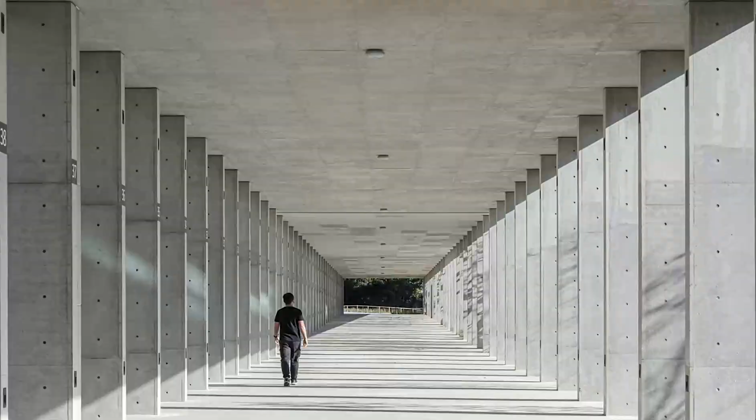So I don't know why the hell we are living in Taiwan, because we are constantly in danger of whatever, maybe from mainland China, from political turmoil inside Taiwan, from earthquake, from flooding, from typhoon.

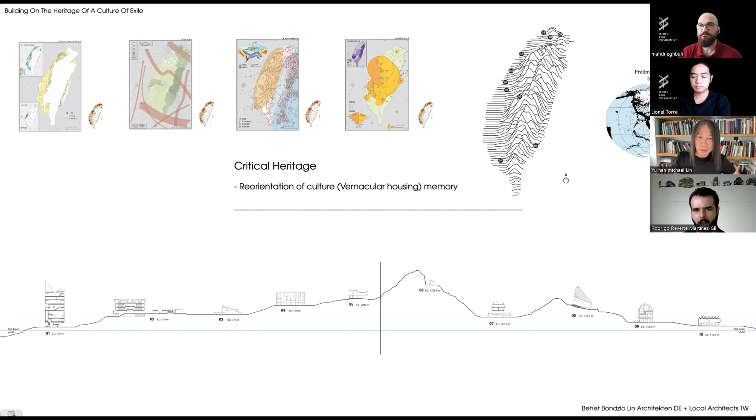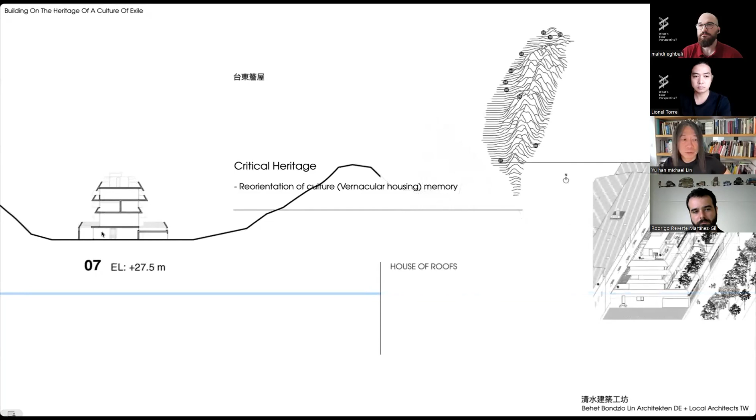And such a reflection will be more or less how we see, how this architecture, where is this architecture from. Going very quickly to this building, House of Roofs, which is the building I built and designed before I won this competition, Columbarium. You can see this is a composition of roofs.

You can see that whenever we visit the place, we first see our first impression of the place, wherever it is, the impression of the roofs, because the roof is the first thing that mediates between the shelter and the sky and the nature.

On the right-hand side is the site behind us. By law, we are only allowed to build whatever is inside with the arches. But they added four different kinds of different roof. First is the roof on the top, to prevent the wind and shelter the sun. Most of the time we have a worship center on the top, or the maids living on the top.

Second is this fake Renaissance roof. For them it's Renaissance, because the master bedroom is sitting behind. So this roof is more or less not functional, but more a gesture, a gesture of wealth.

And then on the lower side, you can see there's this roof, which is actually a roof for their garage. This part is illegal. So you can see that there are a lot of add-on, temporary, and deep-fake roofs somehow in this building, but it's actually in Taiwan. It's everywhere you go, it looks like that.

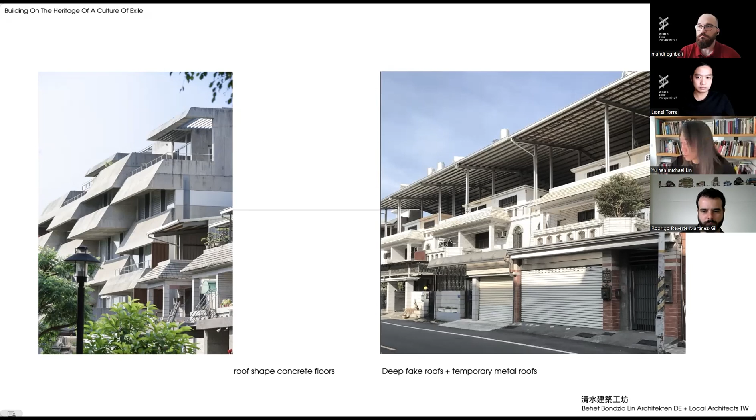So this is the result. We try to locate the roof in a way and stack them together, so that the rain will always fall to the garden, and we never have to collect the water again.

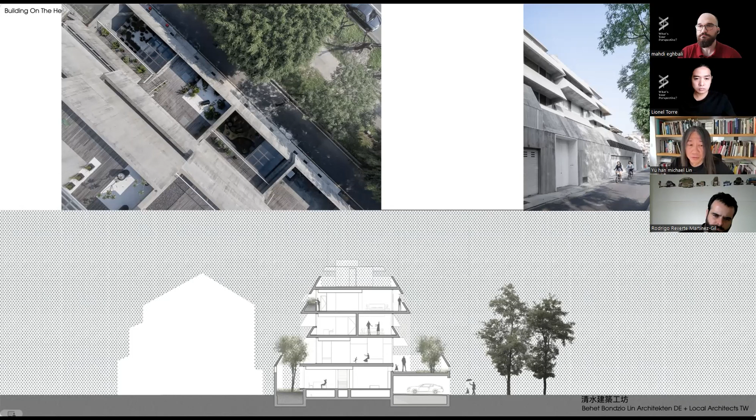And then the sun will be reaching, for instance, this is a sleeping room where we have a smaller gap. Here's the master bedroom facing the terrace in the front, where we're receiving more sunlight. On the lower part is the living room, where we have a private garden. So the roof and the terrace depths are actually a reflection, or the result, of the floor plan inside.

So that's for living people. How do we do with the dead?

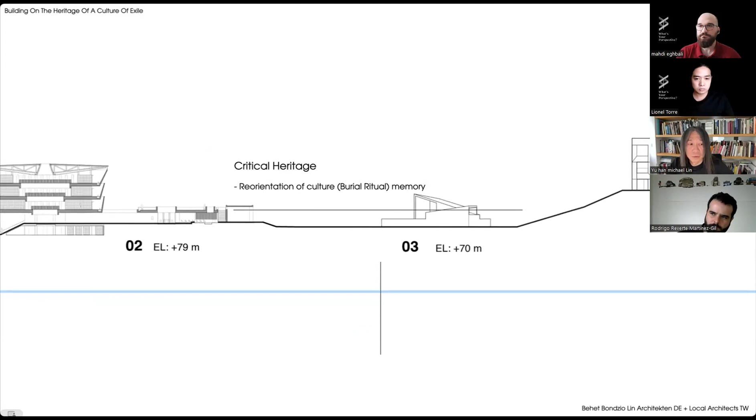So Hsinchu is actually a windy city, and rice noodle - the rice noodle, how to make dry rice noodle, because Hsinchu has a lot of rice noodle because it's a windy city, they have a lot of facility and a geographical advantage to dry noodle. So a lot of this rice noodle is produced in Hsinchu. So this is actually a monument, if we can say, monument nowadays.

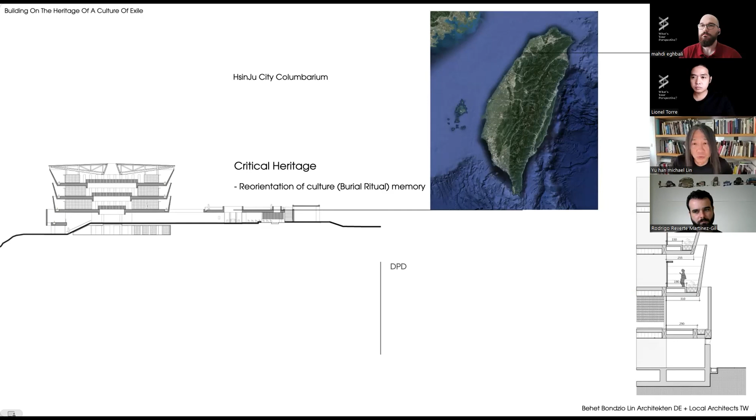What does it mean? The meaning of monument for me in this case is not only for the burial but as well for the wind. It's a tower to celebrate wind.

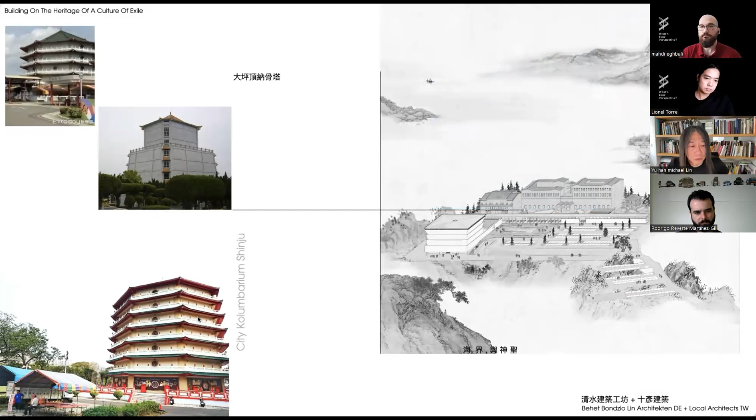This is the Columbarium in Taiwan, stacked up, with all the walls enclosed. Very small openings on the side, and inside there's actually air conditioning, although it's for the dead, I don't know why they have air conditioning inside.

On the right hand side, south side, we have 70,000 urns behind it already. This is the existing building. We are given, in this competition, the task to build another 50,000 urn capacity columbarium on this side.

So again, we have to come back and ask ourselves, this is structured by the ocean. What role does this building play in such a sacred space, and what is the public nature of this sacred space?

What I found very interesting is that the wall never plays a very important role as a carrier of memory in Taiwan, unlike in the Middle East or Europe, where a lot of walls play a very important role. Walls in Taiwan, unless it's a shrine, because that's more uplifting, more solid, implying a sense of eternity, were never really a carrier of memory.

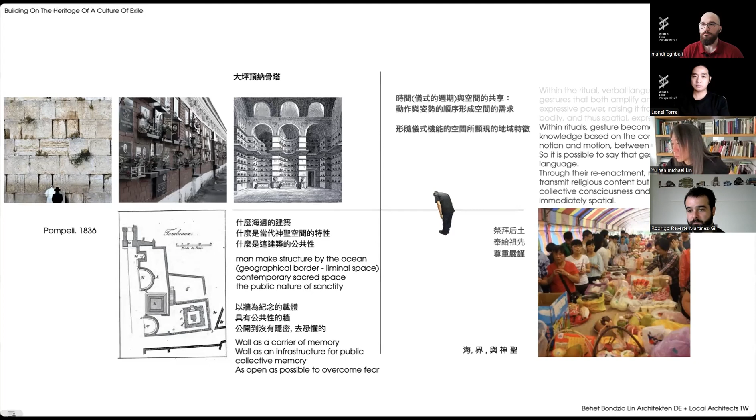Although it's probably more popular, it's in a way more fearless because it's so crowded and so loud, almost like a market, that you don't feel afraid. Everyone just puts the stuff there for maybe a couple hours and then brings it home and eats it, because you are there to salute the dead. That's the celebration. So in a way, it's actually very different from how we understand burial space in Europe.

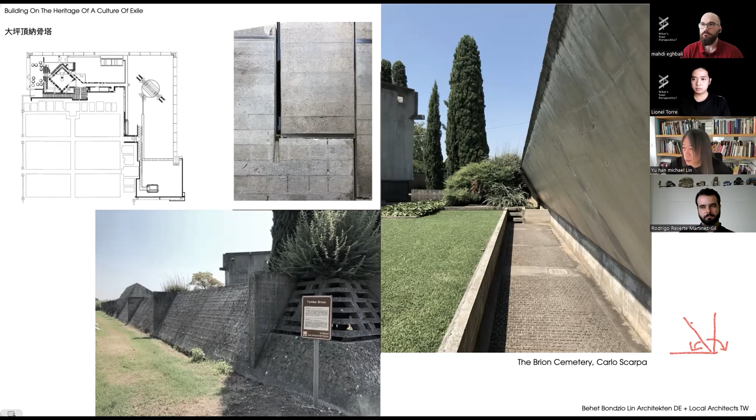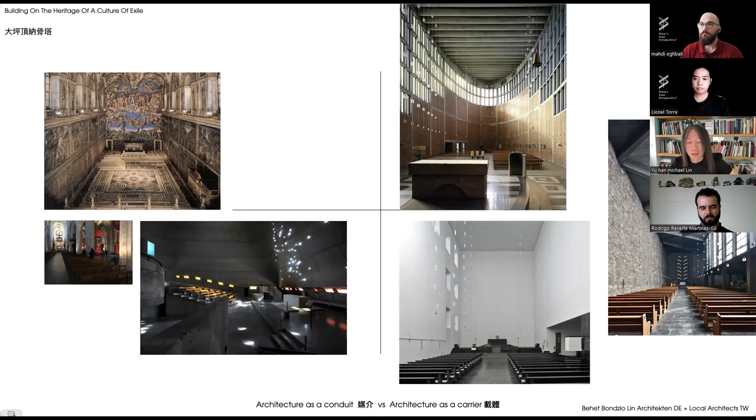One angle actually creates a shadow, one angle catches the light. We would like to think about architecture like a church as a conduit, but here architecture is almost like a carrier, and we're carrying our memory.

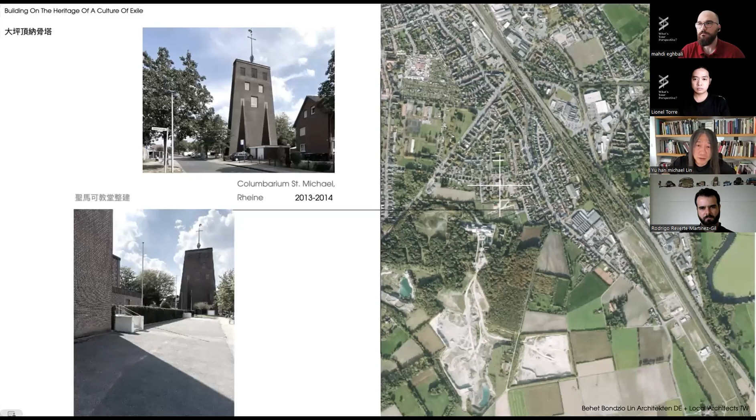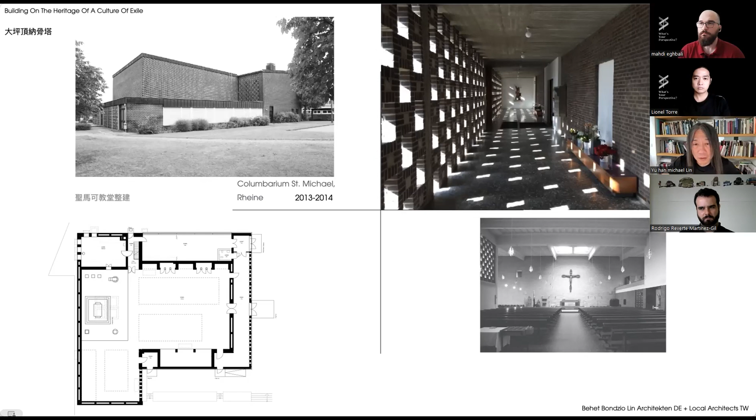Before this project, I did a project in Germany. It's a Columbarium, St. Michael in Rheine. It's a very small town, and this is a church built in the 70s. It's one of the early works of brick brutalist architecture, which I like very, very much.

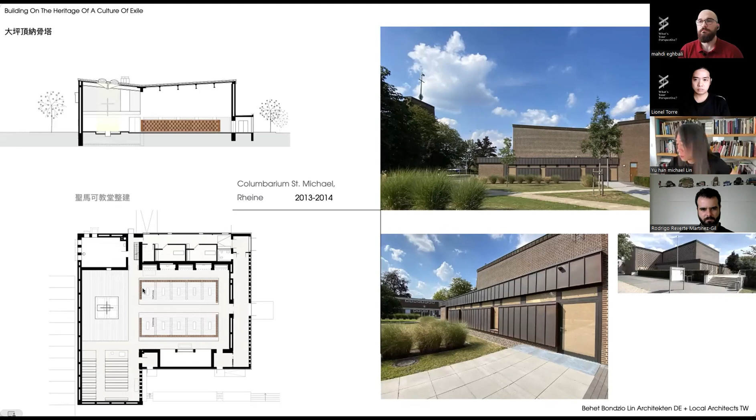We did a competition to renovate this church. When I did this competition, I wanted to make sure the wall of the urn is exactly where the sitting area was. That was the reason why we won the competition, because we wanted to have these 600 urns sitting as a congregation, so most of the people who built this church in the 60s and 50s, when they die, can choose their place and go back to where they belong.

I picked a very warm apple tree veneer, because I wanted this veneer to fit the color of the brick, and to give a very warm feeling rather than a dark and uncomfortable one. We would like to match it with the benches of the church, of course.

This cross is actually wood veneer as well, from the same wood. In the daytime you can see it lit by the skylights above, but in the nighttime, this cross will be lit.

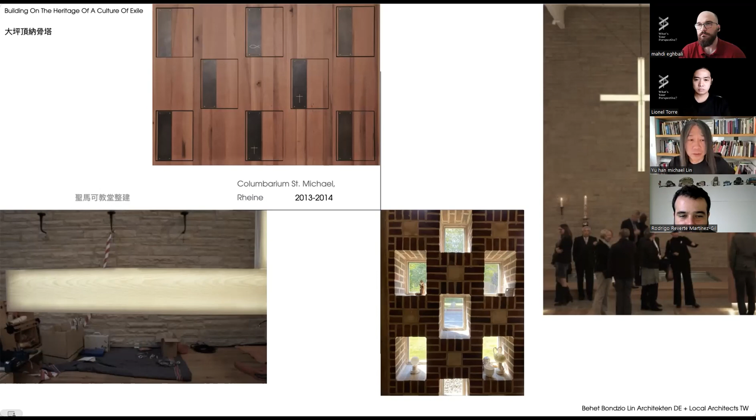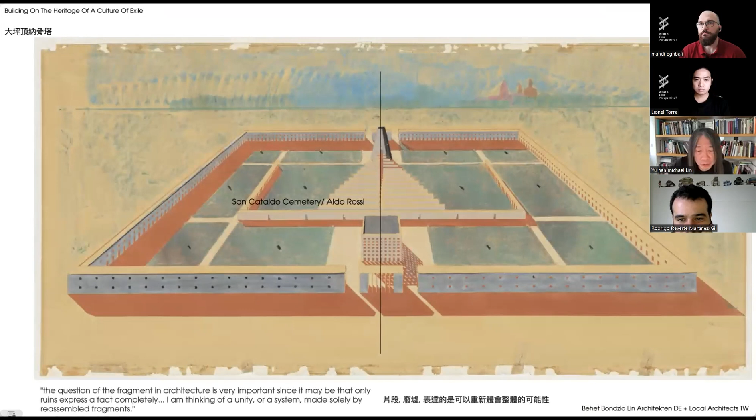So we'll go back to this Columbarium. To talk about Columbarium, we cannot talk about it without Rossi, about fragmentation. Fragmentation is one of the most important phenomena about the society, particularly in Taiwan, because of the colonial history.

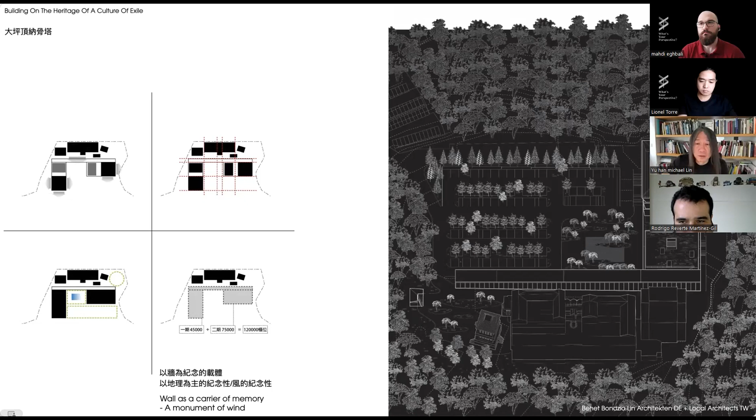This is a city of death somehow. So what we do is think of this as a monument for death, and a monument of wind. We have placed this building fulfilling that function.

We can see that most of the towers or bookshelves, the urns, are placed in such a direction that there's no corner, because they are all parallel to each other.

We try to split it in half, almost like a donut shape, like the church we built. The donut of the church, the outside is void, and the donut of this Columbarium, the outside is solid.

The wall is slanted outside, towards outside. For the house, the roof is slanted inward, and here we slant it outward, and stack them on top of each other.

When we stack on top of each other, we try to collect the wind and the water into this gutter, in a way that we will have a chance to plant trees and vegetation on the inside wall.

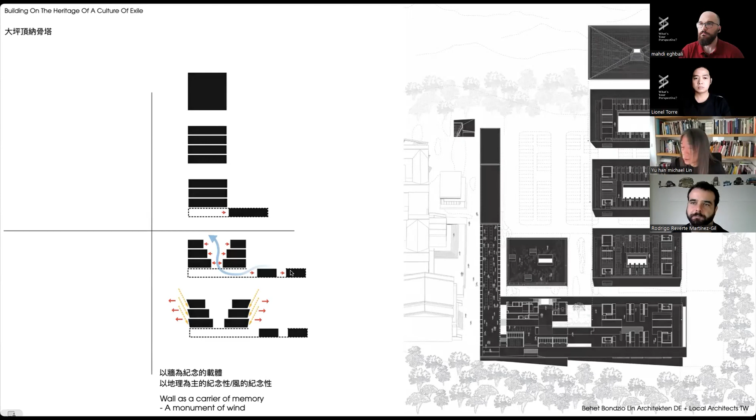So what we do is make this as open as we can, so that the faster wind blows and brings the cold wind out, sucking up the warmer wind underneath.

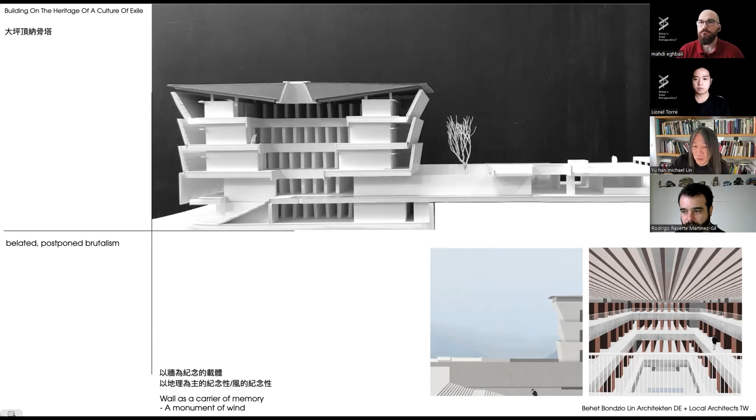So it's for the sustainability. We would like to have this building without air conditioning, without door, without window, giving it a chance to have a natural habitat without artificial facilities to control the climate.

So we actually planned this as a multi-purpose, multi-religion space. You can see there's an invisible cross inside on the top. Of course, this is an existing building as well. You can see it's very, very religious. There's a yin and yang kind of circle situation, but here it's almost like a pinwheel.

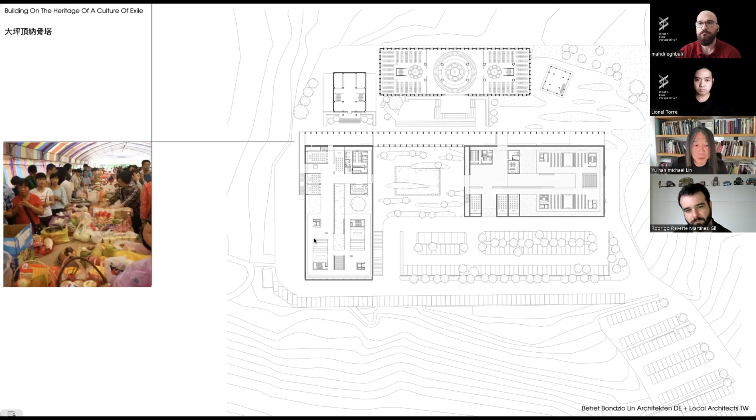The first thing we look at is this loggia, the Aldo Rossi loggia. For us, this loggia is the location of this event. This loggia not only plays an important role connecting the old building to the new building as a buffer between these two zones, but also as a sheltered area for events.

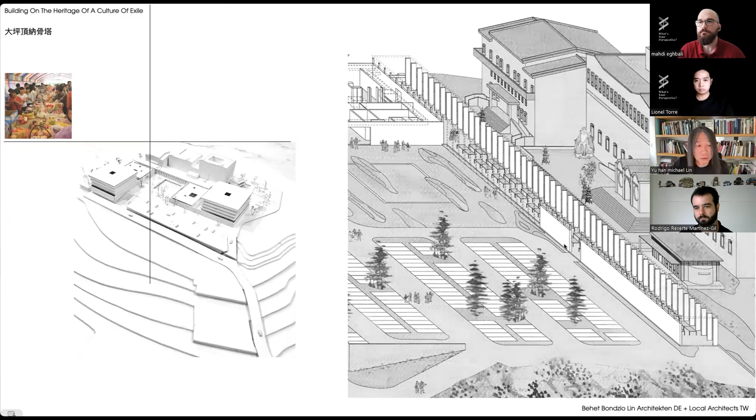So here, this landing, we can see the construction is actually coming from three different things. First, we don't want to see columns. Basically, it's plate stacked on top of plate. So the construction has to be spanning over the whole site, so when we're standing underneath, there's no column that blocks the view. It's plate and plate.

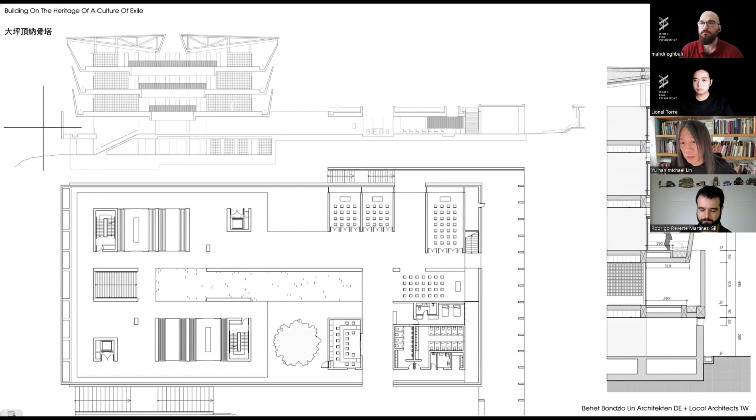First, the construction has to hold the side of the wall. Second, the wall is constructed in a way that it acts as a beam to support the whole plate. So instead of having a beam underneath, it's a reverse beam going upward to support the whole plate. Third, we need to stack the form board on top of that structure to be able to hold the form board on the side. So the thickness of the wall is thicker than normal because we need to tap on top of this wall to be able to construct the form board on the top.

So the size, the plate, the angle is coming from the nature, coming from the construction, without the interpretation of the architect.

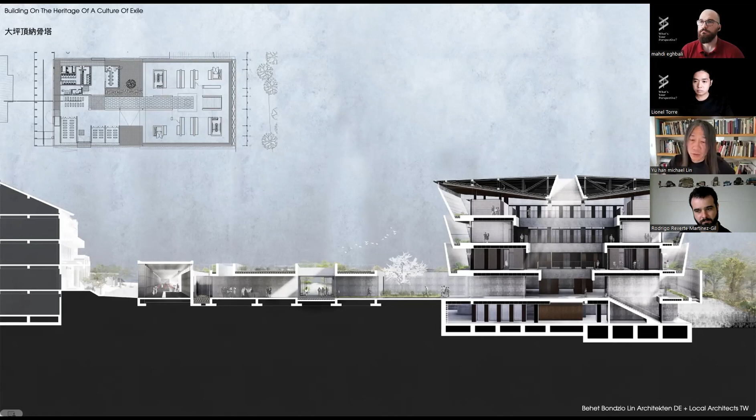So this is actually what we want to achieve, that we would like to have the wind and the rain blow on top of this wall, drip onto this gutter, which we would like to have some vegetation on the wall to give the wall a sense of life and hope with the light. So that is the construction, as we were talking about just now, how we actually planned it in a way that will have minimum wind, minimum rain coming into the building, yet the maximum possibility for this building to be ventilated.

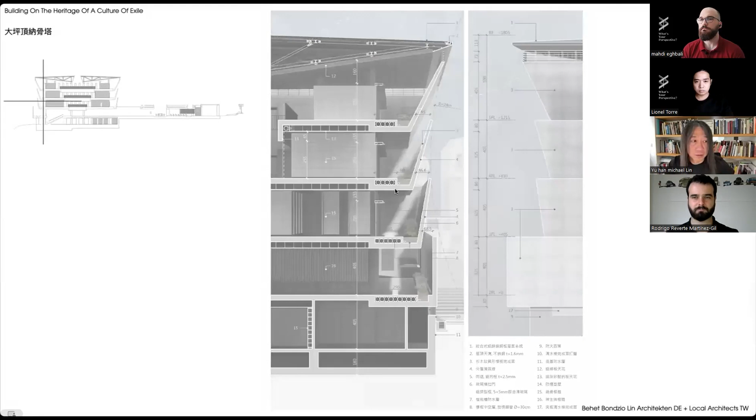Keystone plays a very important role in construction. Here, the keystone is reversed. Like most of the gestures we do, it's reversed in this case. Light coming from the front instead of from the top. Instead of light coming from the top, rather coming from the side. The construction is reversed, the beams on the top rather than the beams underneath the plate.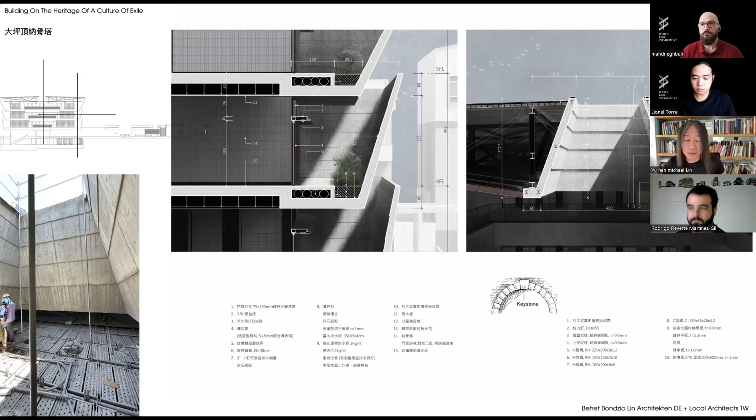So here the keystone isn't dealing with gravity the usual way; it's seated in a way that it's suspended from a precast steel construction. So it's actually being held by the construction rather than using gravity to anchor and stabilize it. Gravity is completely reversed. When we use the most heavy thing and sit it on top, it's almost a reverse of this boat-like construction stacking on top of each other.

So this is the formwork, which is very different from the formwork we saw from the church. Now you can see this is a different kind of construction of the formwork. This is more a Japanese sort of construction. The other is more our interpretation with our local design and local construction company.

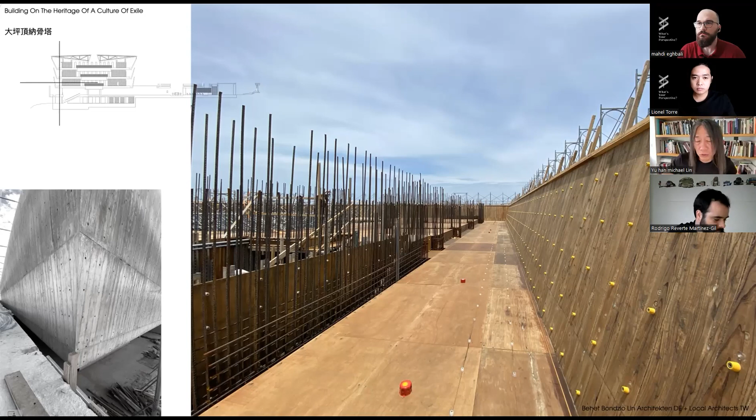So this is the mock-up. We intentionally try to divide the mock-up, divide the surface of the inner surface into 7 different zones, to give the inner surface more of a shingle-like feeling, and to lighten the wall and give the wall more life.

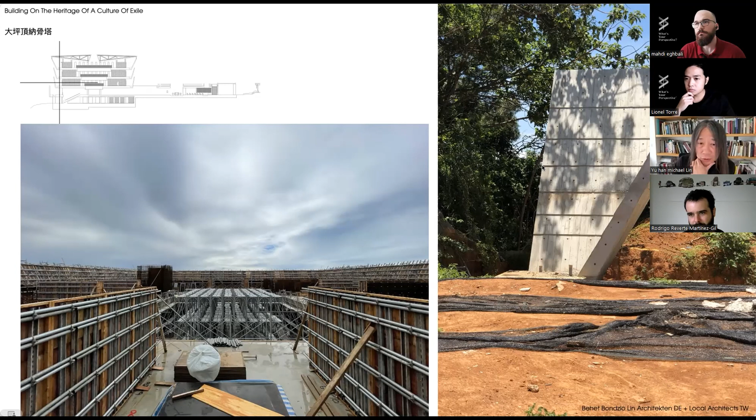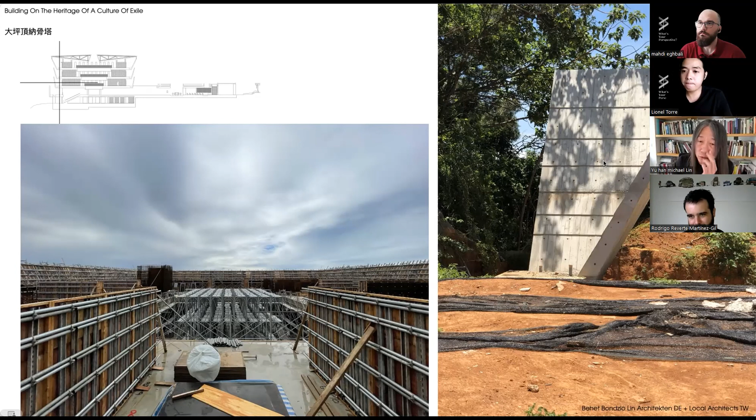But the purpose of that is that we were only able to cast the concrete in the middle, so we need to find a horizontal zone to stop the casting. In a way, this is not only hiding the casting control joint, but also gives the wall a lighter feeling, carrying more of the roughness, to contrast with the life in front of it.

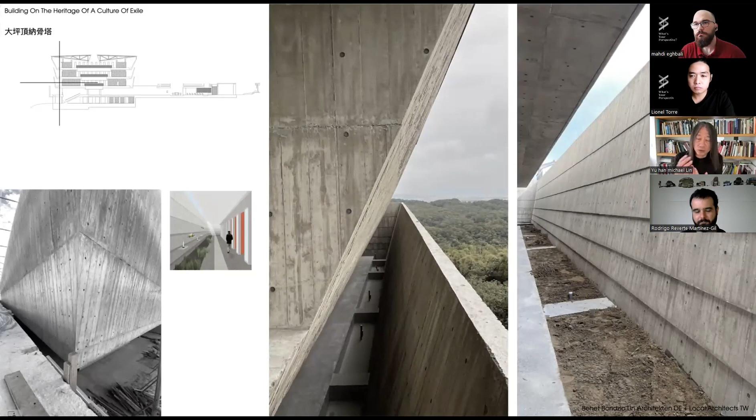So this is when we finish casting the concrete. So we look at the loggia, it's about 800 meters long. And then when you're standing in the loggia, you don't see anything on the side.

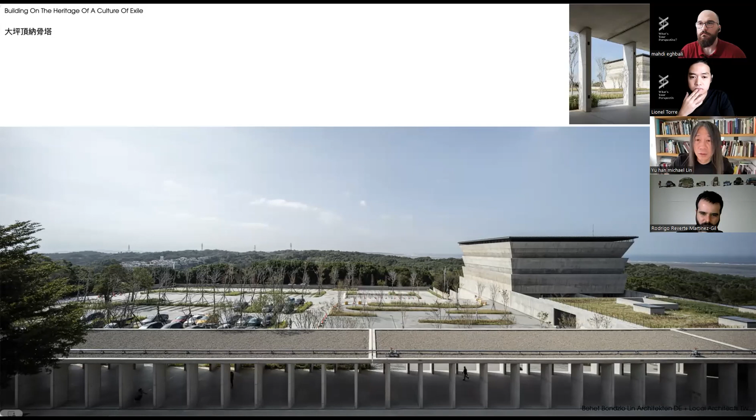But when we're standing in the middle, looking in the opposite direction, you can see the courtyard's relationship with our columbarium. So this is when the event happens, every year, three times a year, we go to say hello to our ancestors, so we'll be able to separate three different kinds of behavior.

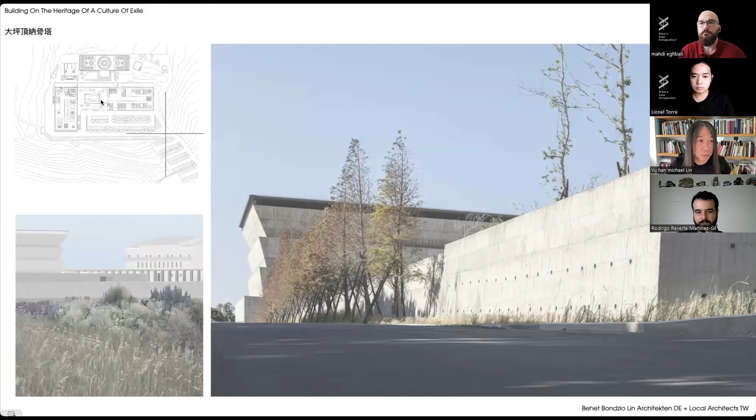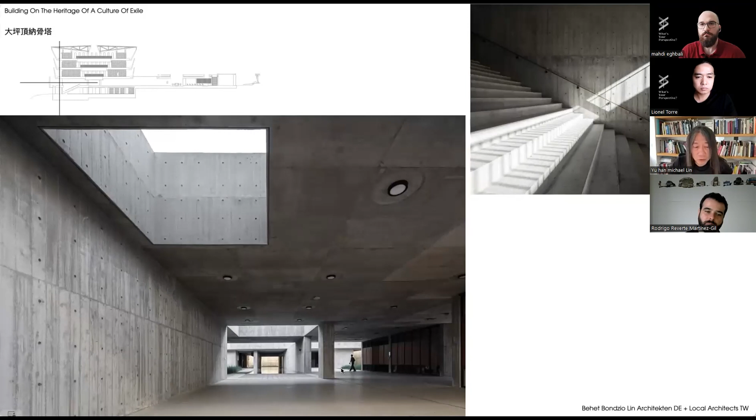First is this more ceremonial, noisy condition, and then second will be inside this ritual space where we say goodbye to our loved ones. Then inside is the first floor, which is more religious, more spiritual.

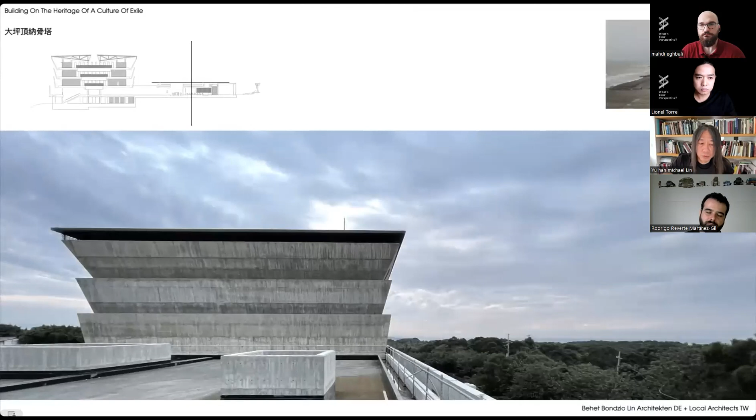So this is actually the memorial space, and then you can see on top we have a roofscape to look at the ocean. It's afterwards, when we have the plantation finished.

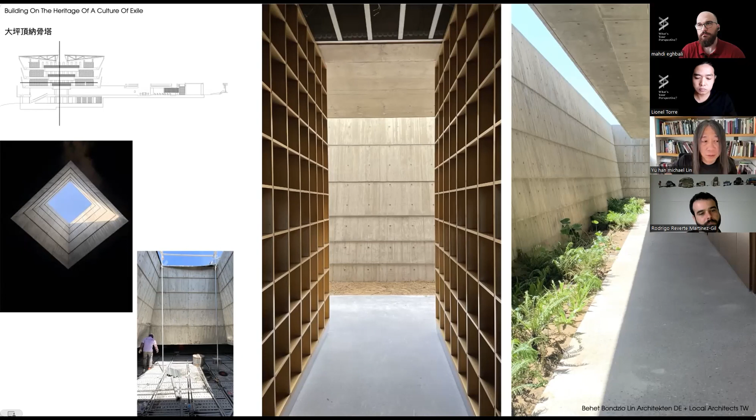On the left hand side is the keystone light, the skylight. On the right hand side, you can see how we actually planned the place to catch the rain for the vegetation to grow.

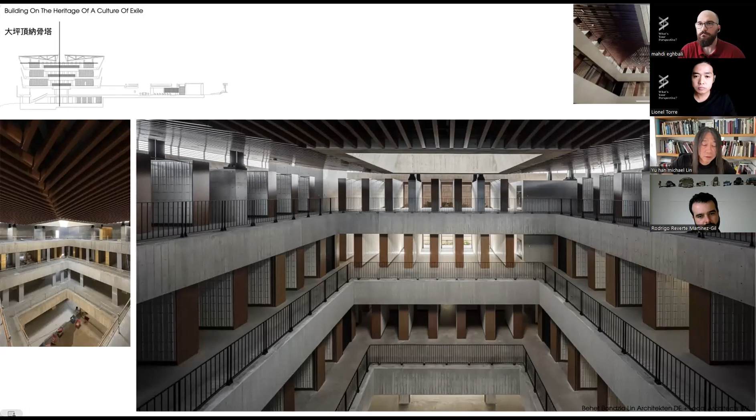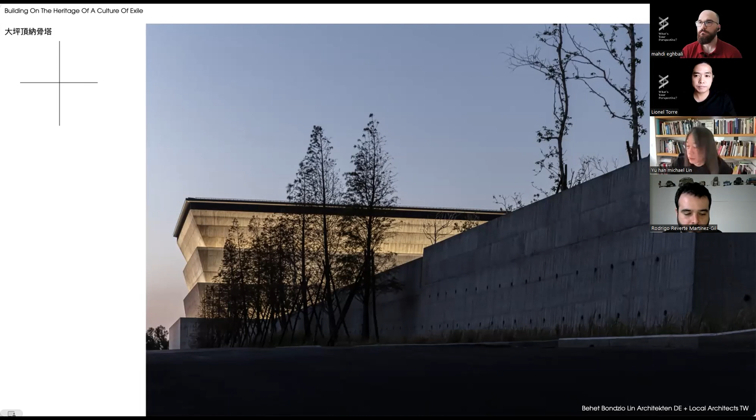This is the picture now in the middle of this very heavy keystone, held by wood louvers. Wherever we go inside the building, it's very interesting how we feel it's always monumental, at the same time lit. In the evening, we would like to see it as stacking lightly. The building was flying almost, although it's very, very heavy. We want to see it as a very light element, flying on top of each other. So that is about it.

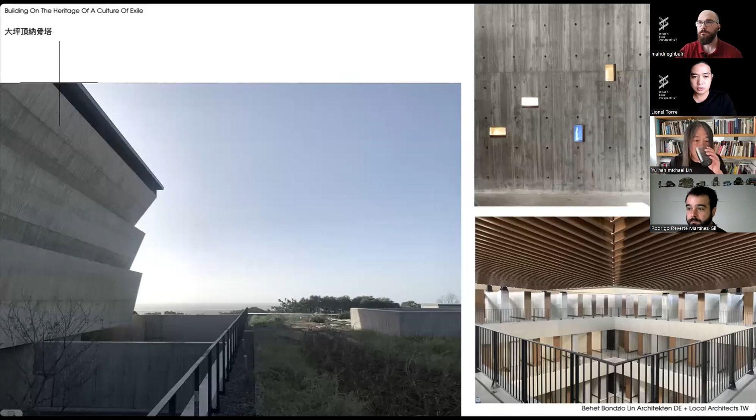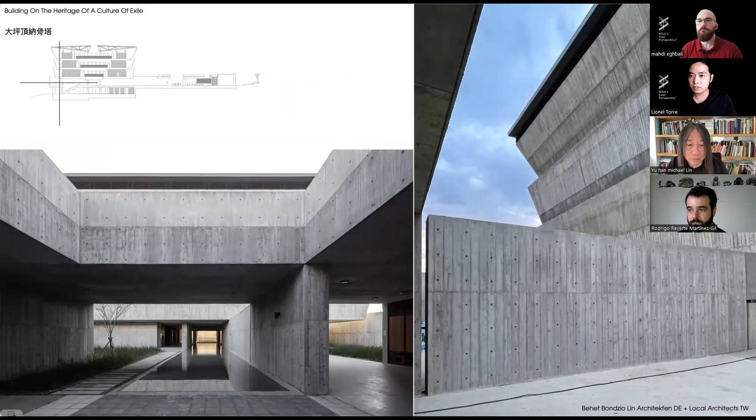Apart from that, I believe it's being used as a columbarium and as a way to put the urns. Is this building used for other activities as well during the year, or is it mainly for specific purposes only?

I will actually go into the next one. Sorry, it's because I set up the 3-second things.

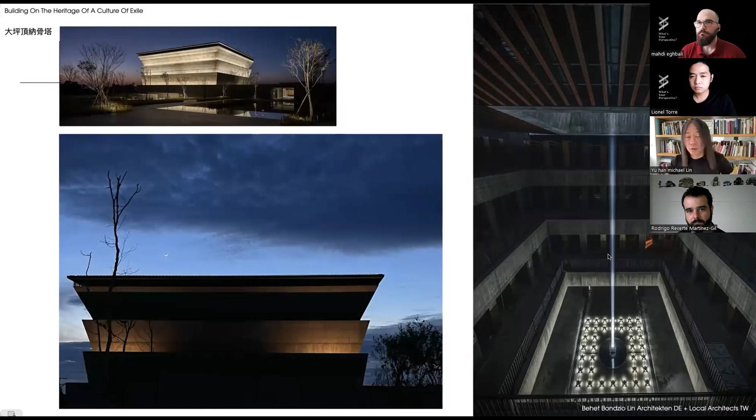Well, because this is actually our show, and there were concerts held because there are steps and floors, and there were some who were able to just stay on the side to look inside. So this is an art exhibition - there are constantly art exhibitions inside or around this building as well. There are some concerts being played inside this building. And surely, if you think of this as a columbarium, most of the events are actually always related to death.

And then I guess you mentioned from the start that you wanted to challenge how people wanted to perceive death through this building. What can you say based on how it is being perceived right now? In your own opinion, or based on your own observation, do you think it was a success on the part of the building, that it has somehow changed the way they view death?

This building has been very heavily criticized in Taiwan, and I would say a lot of it is coming from it being designed outside the norm of the ritual of burial, and heavily criticized.

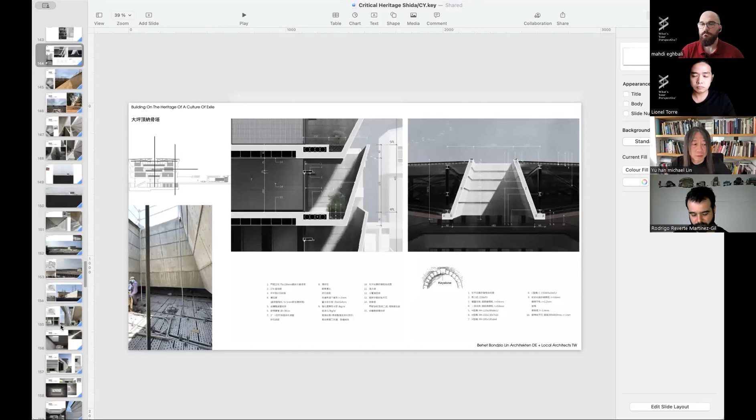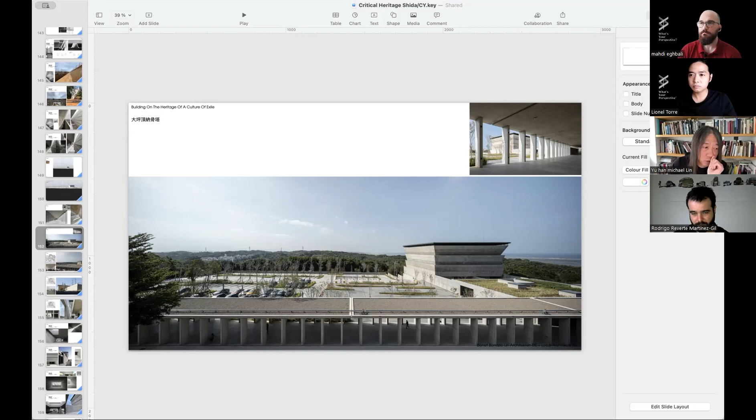It's really not easy to take, because I have criticism about how the rain can go into the building, for instance. They feel their ancestors being bothered, I'd say, and heavily criticized because some part of the building - we have water in the middle. We have a water pond in the middle, and they actually don't like the water in the middle. Although I feel the water gives this reflection a more pronounced effect, and then we have always the water coming from the middle.

Then in the middle, I would like to have nature play a more important role in giving hope. But our ritual of burial doesn't allow such water on top of anything. I think that's a bad sign or bad omen, although I can never explain why.

And they would like me to close the light well in the middle, because they don't like the water dripping into the building - water dripping from the roof is seen as a representation of poorness for some reason, as if the roof is not fixed properly.

To fight against that is quite painful - to explain that we should see it differently. When you bury a person on a mountain, it's always outside. This is a mountain become inside, but such abstraction requires a lot of translation, understanding, and knowledge.

I think it's difficult, and sometimes counterproductive to explain. I actually believe it takes time for them to understand, whether in a sustainability way or in a ritual of burial way. Gradually they will change - they are changing already, and their perception is more positive, they enjoy being there. I have people telling me, 'You have to send me one or two urns because I want to be there.' I think it takes time for this building to be accepted.

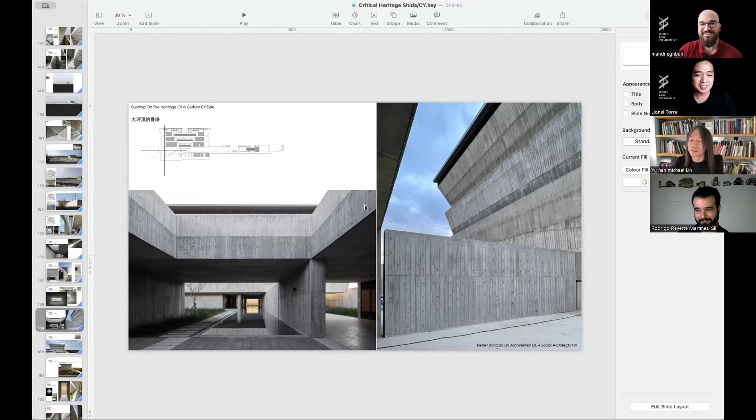Mahdi, you have final questions? Probably the architect's problem in the whole world - they have to convince, that's for true, every single decision. Yeah, I have a question every time you want to change.

Yeah, sure. I have a question in terms of sustainability and the airflow system. Did you test this system? Does this make any difference without having any facilities or electrical equipment in the building?

The inspiration for this comes from the typical building type in the Middle East - in the desert area, you have this wind tower. So we have a firm in Germany called Transsolar, which has been helping a lot of architects, including Rem Koolhaas and many other famous architects, do what's called climatic engineering.

So the slanting of the wall, the speed of the wind, the flow of the wind, the multi-direction of the wind - that's why it's like a fan inside. Actually it's not a fan, it's like a donut, because whichever angle the wind comes from, you don't receive equal amount, but there's always a chance for wind to come into the building. So we have this firm do all the calculations for us.

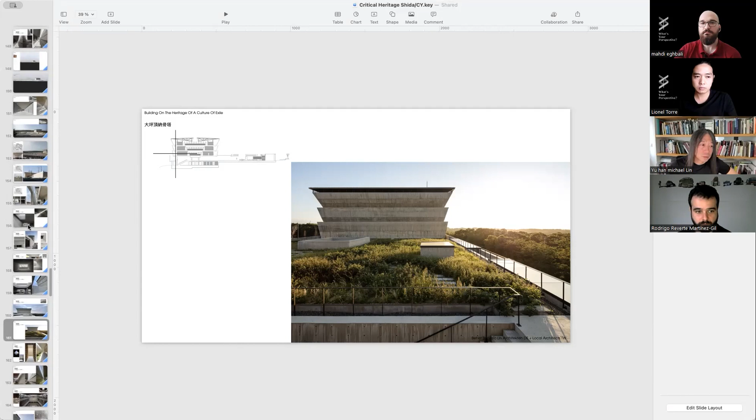When we do the calculation, there are several aspects we have to deal with. First is the rain - the rain comes with the wind, so the rain cannot go into the building too much. Inside the columbarium we have a section, you can see - when the wind blows in there, the rain comes in as well, and we would like the rain not going into the building too deep.

So we have created a second layer here, with a sliding door on the side. The wind can go through the top, but the rain will not go in.

These are all kind of calculated, but every year there are 10 to 15 days beyond the norm, when we have typhoons or extra heavy torrential rain, and sometimes water goes into the building. So it's not easy to deal with. The calculation is based on probability and the most likely scenario, but most of the time I get criticized for this 5 to 10% that's beyond the calculation.

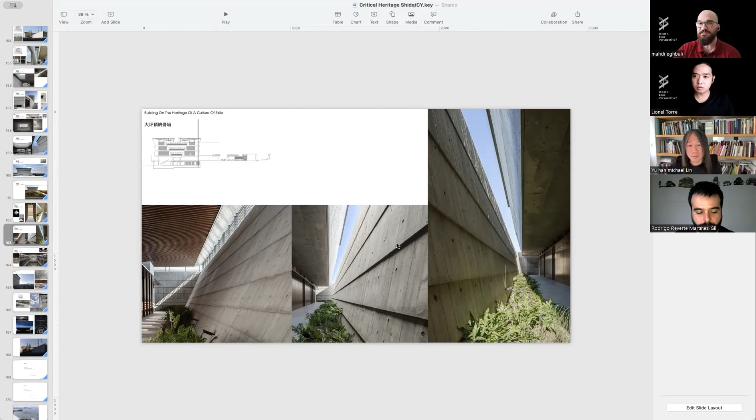I get that. But what's interesting is we all have a similar approach to ancient buildings - all over the world there's this type of wind catcher, using nature to create comfort level of temperature and air circulation inside the building.

Yeah, that's right. Even previous guests we had always tend to bring up this type of approach to dealing with the climate. It's all similar.

I think we learn from the past and look at heritage, because those were born from the climate without any technology. So we try to go back and look at that as a chance to develop something beautiful, sustainable, and reasonable, focusing on how we look into the future and how this material can be used.

I was heavily criticized in Germany - this project was a finalist, selected by the German Architecture Chamber for the German Architecture Prize, but every time in the final 10, they'd say, why a concrete building? We don't like concrete because it's not sustainable, but that's not true. This building is going to last 150 to 200 years, while most wood buildings last maximum 40 years.

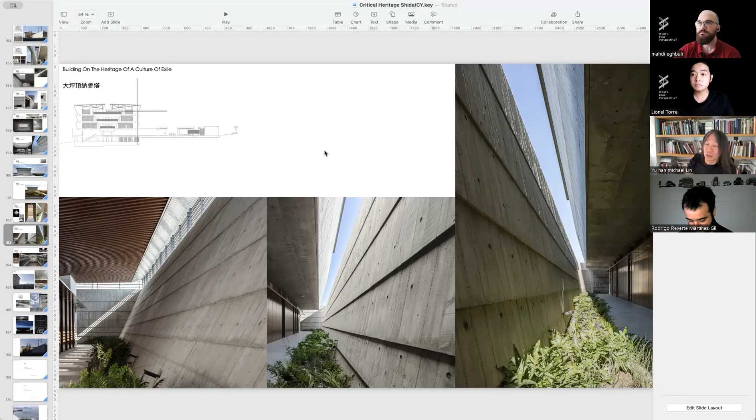How do we look at durability when thinking about architecture? This is an earthquake zone. Some of the criticism I took in Germany about building so much with concrete came from people who have no idea what kind of climate, earthquake risk, or geographical conditions we deal with in Taiwan. Sadly, they took a very high moral ground, just asking why we aren't using hybrid material. We are - when it's possible.